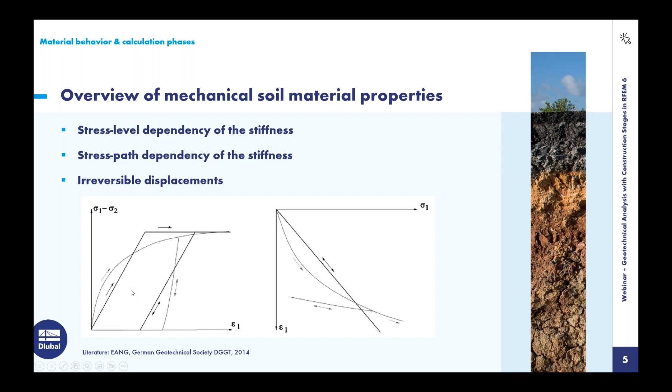Okay, so what follows from these properties is that we don't have explicitness for a stress state, strain state. For one stress state, there is no clear, no explicit strain state.

So this is what we do in the analysis. We calculate a first state of the soil, the initial state, where we only calculate the geostatic stress. Because as we can see, if we start here and consider this geostatic stress, we use the correct stiffness modulus. If we would start from zero and not consider the stress, we would use the wrong stiffness.

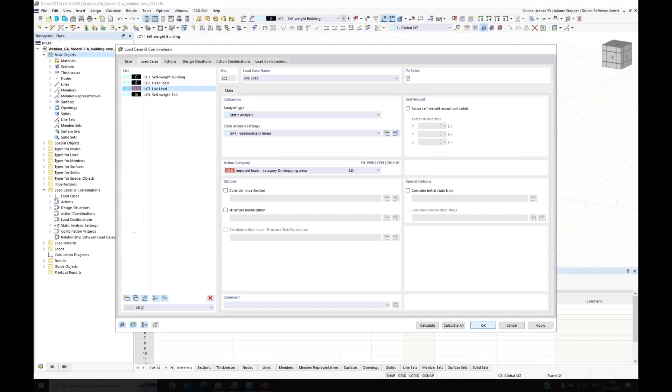Here we see the model we will work with. It is a prepared concrete structure, prepared because we want to focus on geotechnical analysis and construction stages analysis in this webinar. I used this in the previous webinar, but today we will use another material model and learn some details about it. We will use construction stages, so you can easily see differences in the modeling process for the same structure.

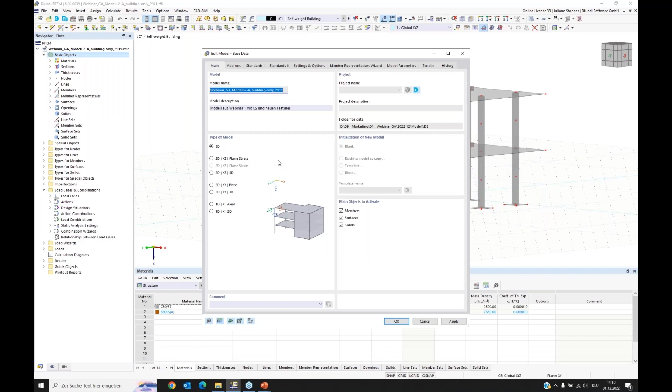Now we start. First, I will go to the base data and open the dialog. Here we have the register for add-ons, and we can find the geotechnical analysis in the special solutions add-ons list. It's activated, and I also need to activate the construction stages analysis in the analysis add-ons. I agree, and now our main program RFEM, the finite element program, has some more input options, calculations, and output options included for these add-ons.

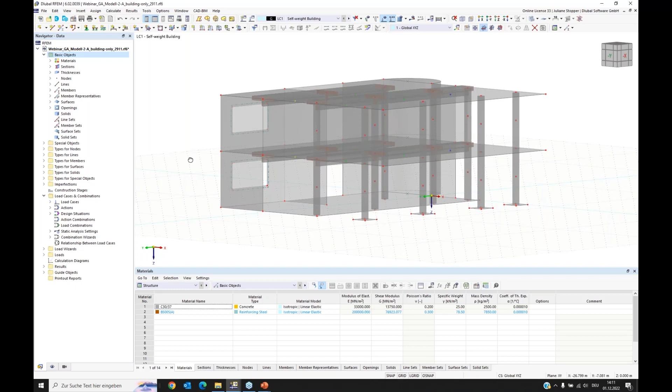Now we can start defining the data. First I will go to the materials, open the dialog, and here we can enter our soil materials. We already have the concrete and the reinforcement steel. I will now create a new material - it will be my first material, a fill layer which is sandy. This is the name of the material, and what we need to edit is the material type. Here we have soil provided, and we need to set the soil material type. Only if soil is selected are the specific soil material models provided.

As I said in the last webinar, I used the modified Cam clay model. Today we will use the nonlinear elastic model. On the right side we have the option to enter the basic material properties. I will start with the Poisson's ratio - I got these from my geotechnical report. The first layer was tested to have a drained specific weight of 17 and a saturated specific weight of 20 kilonewtons per cubic meter. So these are the basic properties.

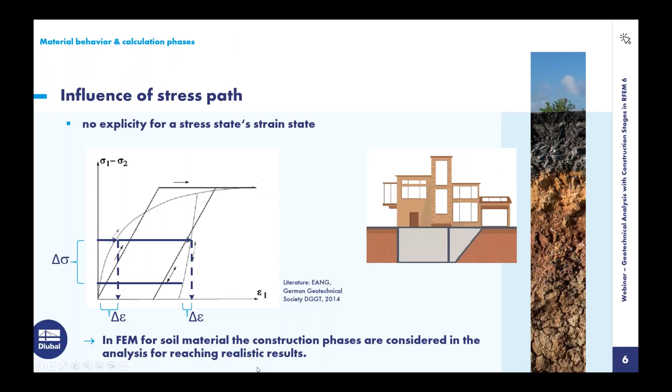We have here our stress. This is the variable value which the program calculates in the analysis and fills for every element, every situation specifically. We have the cohesion here, and we have the friction angle, which we know.

What we need to have also is a reference value of the stiffness. We need one value of the curve, which is given for one reference stress. We fill here the reference stress, and this is the reference value of the oedometric modulus, which is the value we also need to give. With these input parameters, we can calculate the oedometric modulus for each depth, for each stress condition.

And we also have this parameter. It's the power for the stress level dependency. This value generally moves in that range. It can reach between 0.5 and 1.0, 0.5 for sand and 1.0 for clay, somewhere in between.

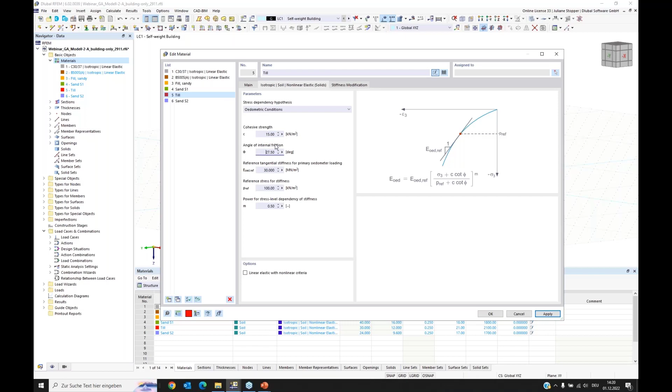So I have here 35 for the friction angle, and we have 58 for the stiffness. What I forgot is the cohesion - I didn't change it. In the till layer we have cohesion of 15 kilonewton per meter square. And this is it, these are my materials.

Now I can see they are defined in the model, and as the writing is in blue, it means these materials are not used yet in any objects. It will change later, it will be black like it's up there. I'm having a look at my basic objects, and I don't need another basic object.

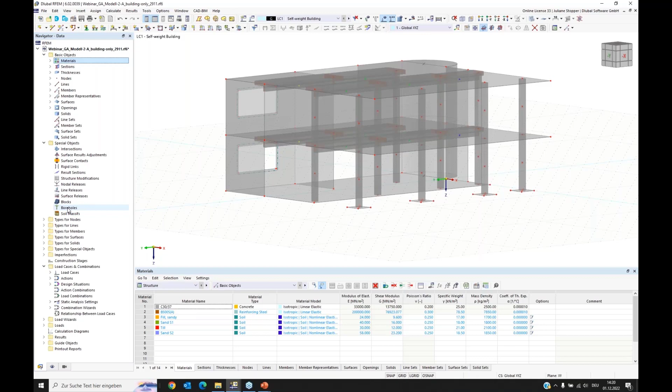We can go to the special objects, and here we find objects we can use for the Geotechnical Analysis add-on. We have here the boreholes, and I will create a new borehole. In this dialog, you can enter the boreholes that you received from your geotechnical report. There were tests done, and you have information about the boreholes that you can enter here.

I will now create one borehole. You can enter a name here - I will keep the default name. You have to enter the position, the top position - I will keep it at 0.

Then you can activate groundwater if you have one. For my situation, the groundwater was found to be at 3.9 meters depth. I agree to this, and then I can start to define the soil layers.

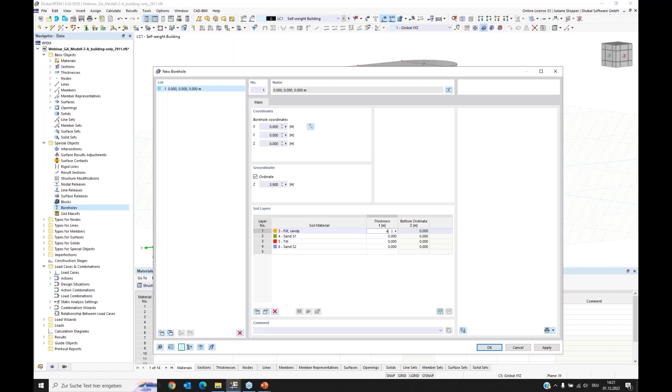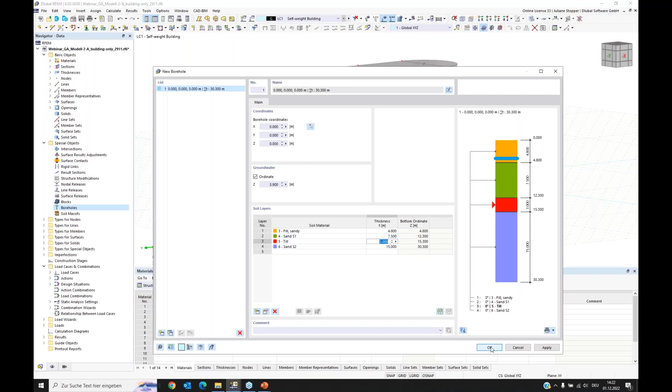In the upper layer I have the fill, then the sand follows, then I have my till and the second sand layer. These layers reach depths as follows: 4.8 meters for the first layer, 7.5 meters for the second layer, the till which is 3 meters thick, and 15 meters for the last layer. Now I defined all the information needed for my special object.

For my soil borehole, I can see it's shown here. I want to remove this grid - it can be found here, and I can set it to be not visible.

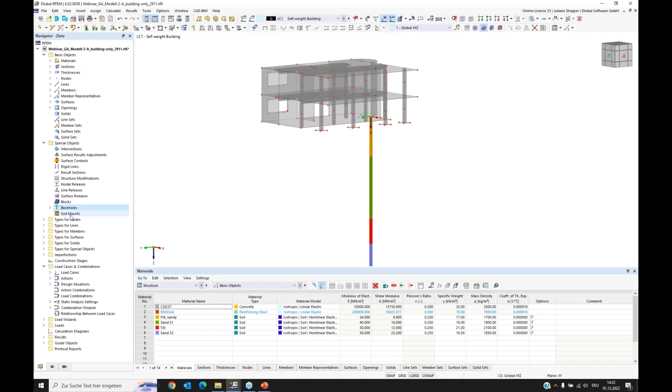Now I can create the soil structure. It can be found in soil massifs. I open it, and here we can generate the soil structure from boreholes. For this, we have to assign the boreholes - here we can write the number directly, or we can use the graphical selection.

We have to give the position of the massif. It's placed at 6 meters in X direction and 8 meters in Y direction, and it shall have dimensions of 48 meters in each direction.

And I have the option to activate the groundwater. We have groundwater and we want it to be considered, so I activate it. Now we gave all the information needed for generating the massif from the borehole, and with the generation of the massif, the groundwater surface will also be generated. I say okay, and here we can see our soil massif.

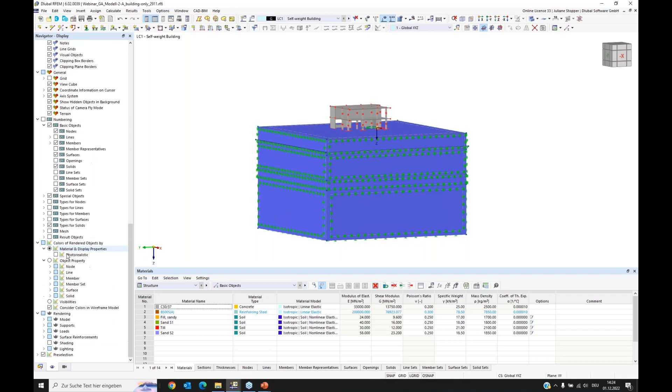We can see quite well the groundwater level surface. I will set the solid model, and go here to the navigator display where you can set display settings. I want my model to be displayed in colors dependent on the property, the material. Now I can see the soil layers quite well.

They were generated from the information that comes from the borehole. If we would have more boreholes, it would use spline functions and NURBS surfaces to generate the different layer surfaces between the different layers of the massif. I showed this in more detail in the last webinar. Today I only want to use one borehole.

Now we have the massif, and the massif generated soil solids. We have the soil solids - 4 solids, one for each layer - and as we saw, it generated the groundwater surface, and it also generated the surface supports.

The massif - we can see the surface supports and types for surfaces. Here we have surface supports. The blue ones I don't need, and I will remove them.

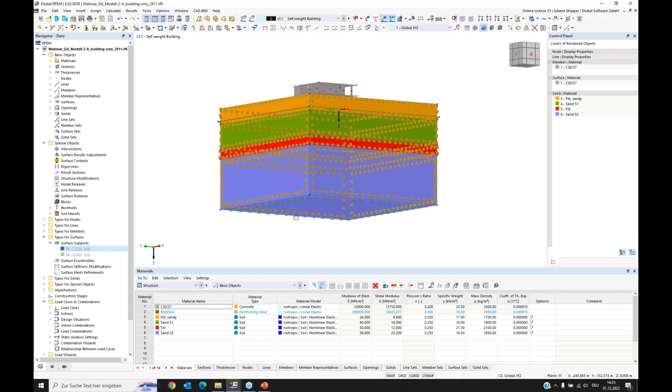We have surface supports for the vertical surrounding surfaces that are sliding supports, and the bottom surface has fixed surface support conditions. As we are here, I want to use these supports.

I want to create an object selection. For this I select the surface supports and go to Edit, and here we have Select, and here we can see related objects. Now I can see that all the surfaces related with these surface supports are selected. I do a right click and say Create Object Selection, and I will give it a name - it's the boundary surfaces.

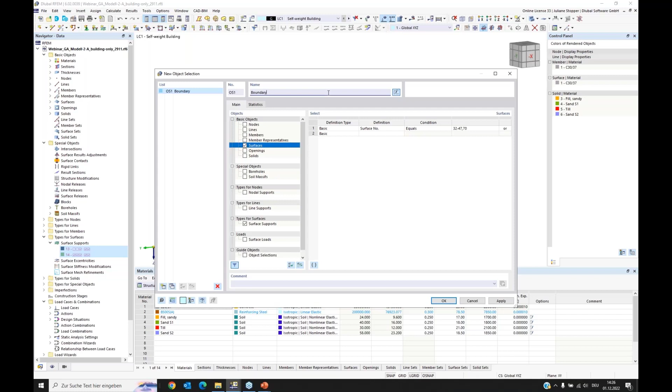This selection I can use later, and I can see them here in the guide objects. I have my object selections, and whenever I want to use the boundary surfaces, I can go here and I have them.

Now I want to go on. We defined the structure of the soil. We have our building, we have the geometrical boundary conditions. Now we need the load conditions.

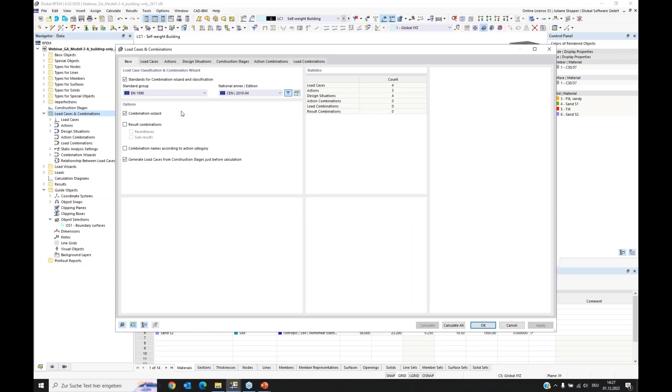For this, we go to the dialog for load cases and combinations. I just shortly want to show you the loads which I prepared. We have here, I want to start with the last load case of the list.

If we activate the add-on Geotechnical Analysis, we have a special action category called permanent soil. If we activate this action category, the self-weight that is activated uses only soil solids for the self-weight calculation of this load case. So this is the load case that calculates the self-weight of the soil, which we need for the geostatic stress calculation for the initial state.

Okay, and then we have in load case 1 the self-weight of the building. Here we can see that the self-weight is activated except for soil solids self-weight. And then we have dead load and live load, which are prepared in that model.

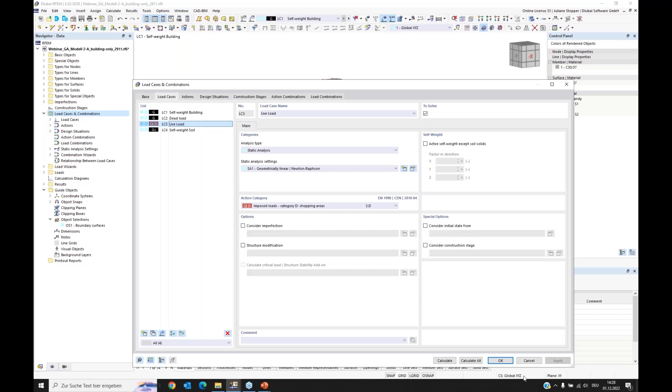I can have a look at them. We have here the live load, here the dead load, and I can deactivate the loads with this button.

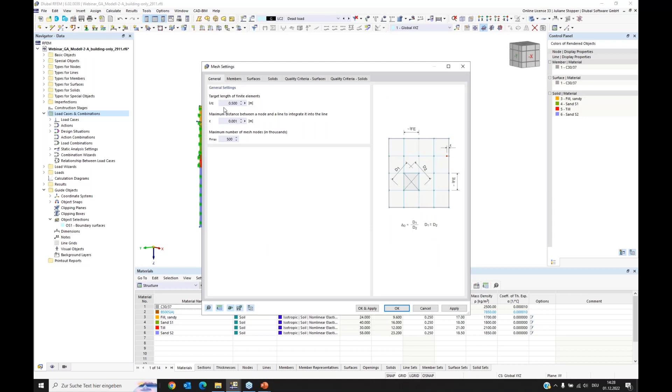What we also have are some special mesh settings, which we can find in Calculate. Here the mesh settings are placed, and we have the general settings that contain the target length of the finite elements for the structure. We also have the option in solids to activate a special target length for finite elements of the soil solid, as it is much bigger and needs larger elements.

So this I wanted to show you. We keep the default settings. Now our structure is prepared and we could do the finite element analysis, but we want to use construction stages, and these need to be defined now.

As we can see here, we have this point in the navigator, which came from activating construction stages analysis, and I click on New Construction Stage to come to the dialog. In this dialog, I have to define which objects shall belong to a construction stage or shall be considered in the calculation. This is my first construction stage, so it will be the stage where only the soil solids' self-weight is calculated.

For this, I need to make a change in the solids, and I need to make a change in the surfaces. I have to consider the boundary surfaces. By activating them, the special registers were opened, and I can add or deactivate solids here, and I want to consider all solids in this construction stage.

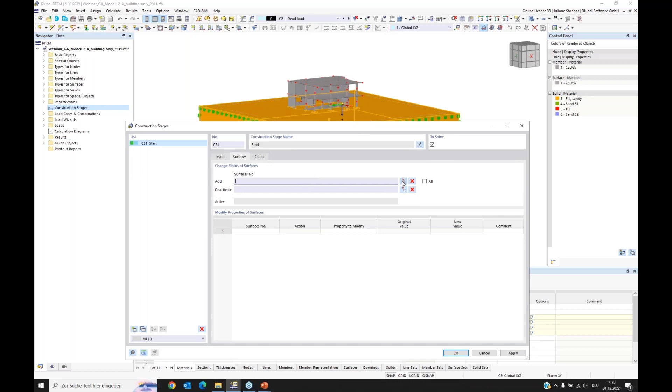Now they are selected. And here I want to add the boundary surfaces, and for this I can now use my object selection. I have prepared it, and I can click here and it is added. So now my surfaces for the surface supports are added.

I also add my surface for the groundwater level, which is surface number 27. Okay, I apply this and I have my first stage defined.

Then I define a second stage. This will be a stage where I will change something in the static analysis settings, which I'll show later. In this stage, I don't want to change anything in the structure. I still only want to have soil here, so I don't need to change anything. I can deactivate these fields.

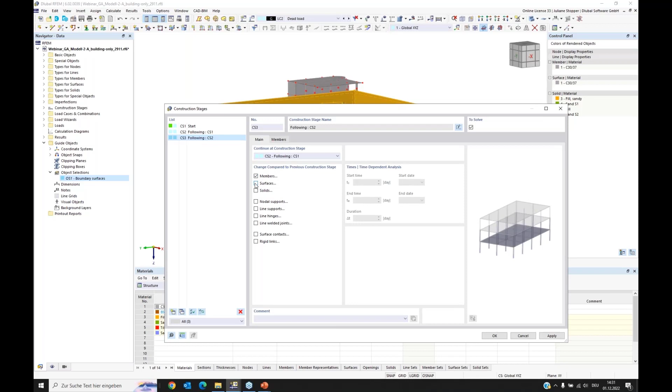Now I can create a third construction stage, and here I want to add my building. So what is contained in my building needs a change in the members and in the surfaces. In the dialog for members, I can say I want all members to be considered, and I want all surfaces to be considered. Now it is okay. I have created 3 construction stages and I can see them here.

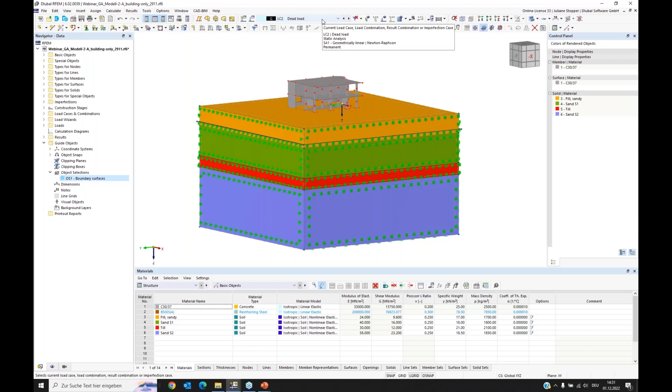The program reacts more slowly due to the use of GoToWebinar. Okay, I have something activated—show hidden objects and background.

I don't want this, so now this is what we have. We can see what we have in construction stage 1: the soil as I wanted it and the groundwater level surface. In stage 2, I wanted to have it like this as well. And in stage 3, my building will be activated.

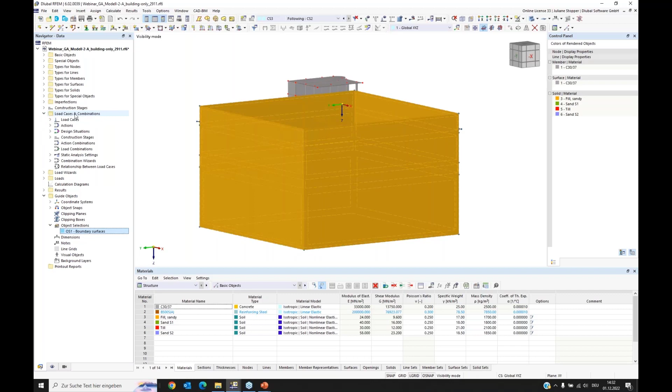This is the topology part of the construction stages. Now I also have to set the loads, which loads shall be active in which stage. I have to give this information. For this, we have the construction stages input placed.

I go to the dialog and can see the stages listed here, and I can do load settings for them. So we are now in the first stage, and we have the register load cases. Here I can say that I want the self-weight for soil to be considered. In the second stage, I also want only the self-weight for soil to be considered.

And as it is a permanent load, it is already there—it comes from stage 1. In stage 3, my building is placed, and I want the self-weight of my building to be considered.

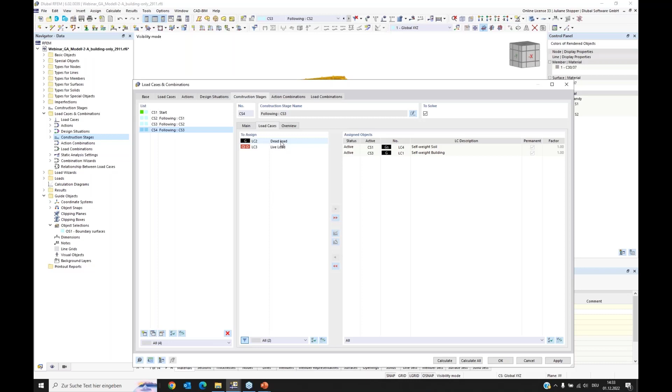Then I create a next stage. In this stage, I want the dead load to be placed. Then I activate or create another stage. In this stage, I want the live load to be used.

Okay, so I have 5 construction stages in my model. What I need to do now is set my second stage. In this stage, I want to reset the displacements.

If we think about the first stage, in that stage we calculate the geostatic stress in the soil solid, and we also receive from this geostatic stress displacements in the soil solid. But I don't want to see these displacements in my results. I want that when my construction of the building starts, this is my zero point for the displacements.

Therefore, I reset the displacements of the geostatic stress state, and I will do this in the second stage. We have the special feature for resetting the displacement in the static analysis settings, that's why I open them here. Our SA1 is the static analysis settings we use.

I also change the load increments as we use the non-linear material model. I want the load to be put in increments, and as I entered 4 here, I now have the option to save results of all load increments. I want this to be done. Okay, this is my basic setting.

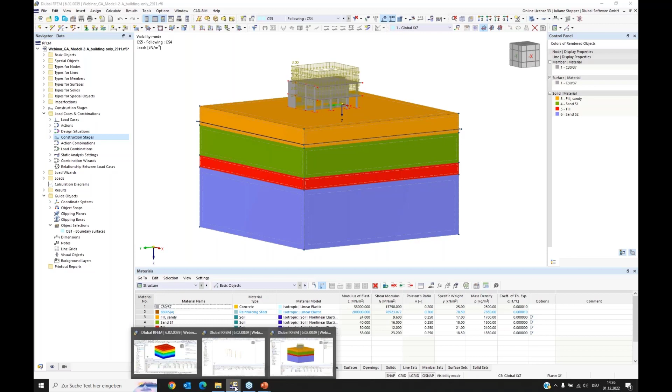I won't do this now. In order to save time, I prepared a model which is finished and calculated, and we will have a look at it with that model. I get it to here. It's a bit slow.

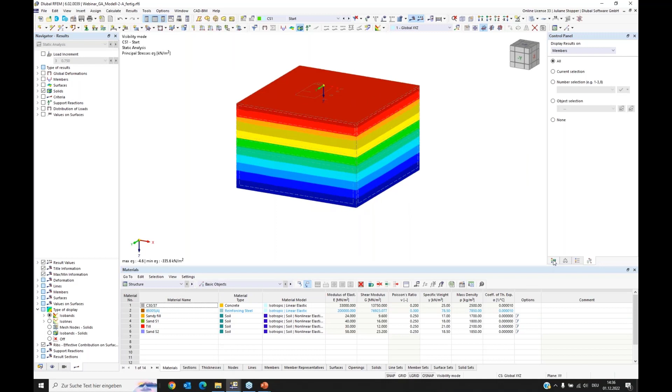Okay, so here we see the equivalent model after it is solved. We can see now the first construction stage, and we can see the navigator results, and we have solid results. I will at first show the sigma z in z direction, and this is the stresses we receive only from self-weight of soil. This is my initial state, from that we start the construction.

As I said, these stresses cause, of course, global deformations—we can see them here. And I don't want these deformations to be displayed in my results for my structure. That's why I reset these displacements in my second stage.

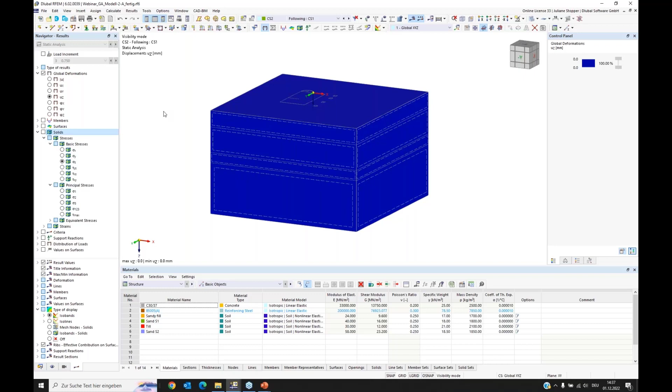Now we can switch to the second stage, and we can see that it worked quite well. We have no displacements now, no deformations in this soil solid. When we have a look at the stresses, we can see that we have the stresses. So I reached what I wanted: I have the stress considered, but the displacements are reset. Okay, now the building can be put on the soil.

And I can see my global deformations only caused from the building. Okay, this is as a short overview.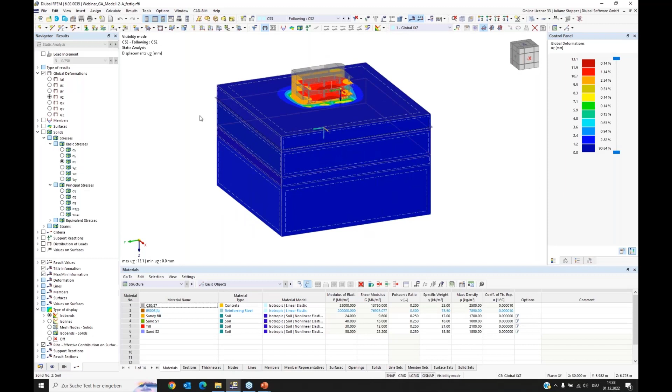Now I want to show some more stress results. This is my stress in Z direction, after the construction is built and the self-weight of the construction is considered. I have also my dead load assigned, and we can have a look at the load. And in this stage, stage 5, my last stage, I have also the live load assigned.

And this is my total stress at the bottom of the solid. If we compare the stress received at the bottom surface with the stress from the initial state, we can see that the stress changed only by about 1%. So the distance of my building to the bottom surface, for example, is far enough.

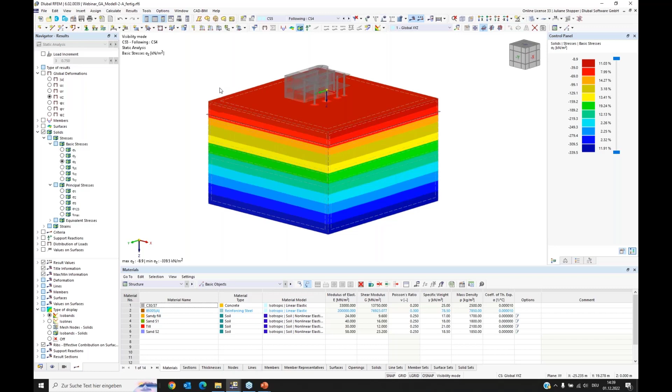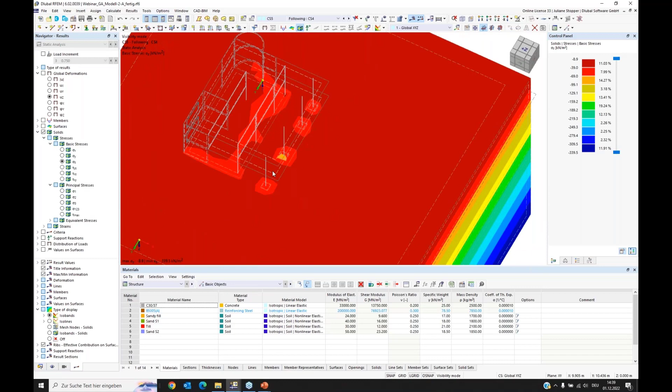What is also of interest for us is the contact stresses. Therefore, I will go to the wireframe model view to show this perspective. And as we can see, the result is not easy to analyze, as the high stress values of the solid are considered.

Therefore, we have the option to get differential results only for stresses of the building, because now we know that in our whole structure the result of the stresses of the soil self-weight is considered. If we check the differential result, only the result of the building, we can see the contact stresses.

From the structure, therefore I prepared load cases. This needs to be done for load combinations I prepared. I will only shortly open this dialog.

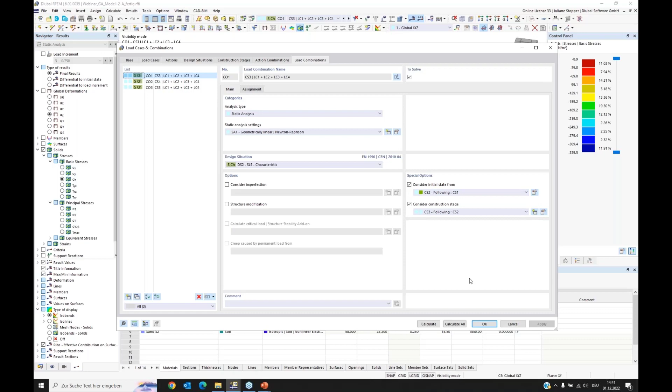There you can follow the definition of the load combinations more in detail. In this load combination, construction stage 3 is considered, and its initial state is construction stage 2. And now I can check the differential result, which is the result between this load combination and its initial state, which was the load case or stage that considers only the soil self-weight. So now in here we only have the self-weight of the superstructure and its effect on the soil.

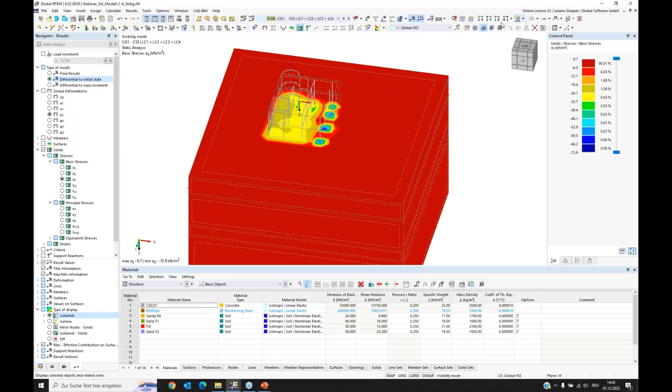I will have a click here and again here. Yeah, and now it's more easy to check the contact stresses below my building.

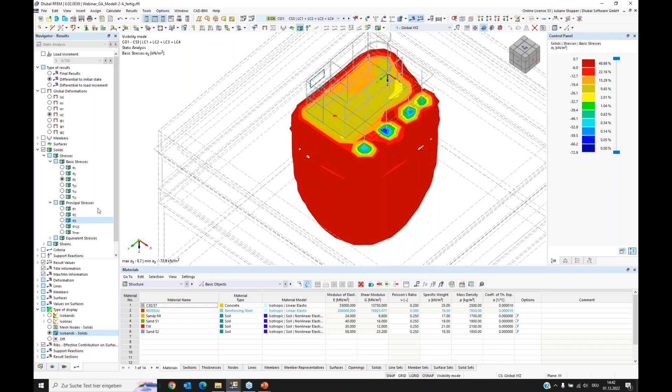I also want to show another display type. You also can use isobands for solids. And I can have a look, for example, at principal stresses sigma 3. And now I can see how this building self-weight affects the soil solid.

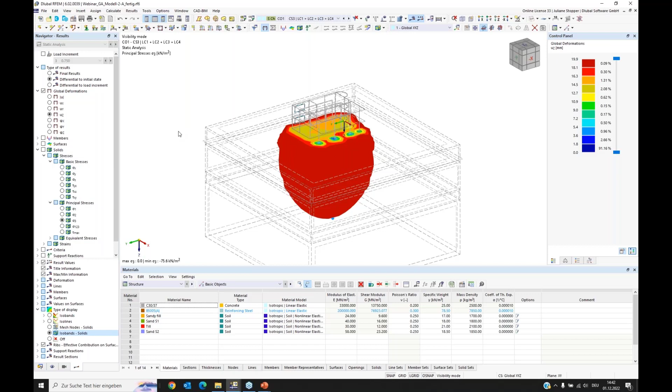This I wanted to show you. Now shortly also I want to go back to the displacements or deformations. We can go here and have the isobands display type. And now I want final results.

And I can go back to construction stage 5, which is the sum of all the building, of the dead load, of the live load.

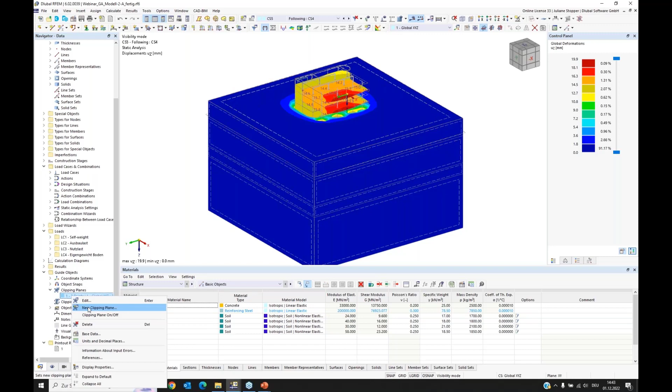And we have a tool which is quite helpful for the analysis of the results. We have here in the guide objects the option to define clipping planes. I prepared one and I will switch it on. And I have a cut through my solid. I can define the plane in the position I want, in the slope I want, and I can have a look into the inside of the solid.

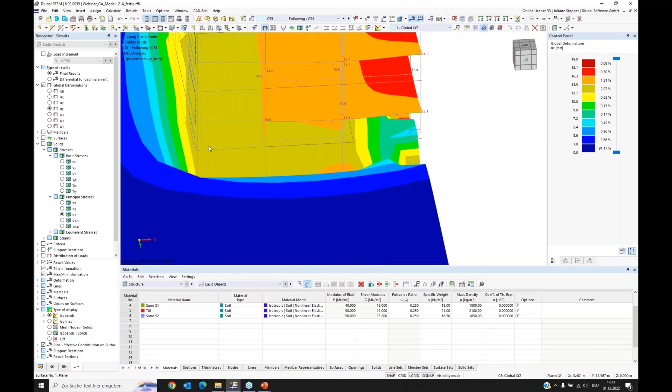What we can see in this graphic is that by considering the soil solid, the soil structure interaction can be analyzed quite well. We can see effects like, for example, the surface here, the foundation slab and its settlements. It has an effect on these foundations of the columns, and even these foundations have an interaction with each other.

And if you want to change something in your building, or you need to change some cross sections or some stiffness somewhere, directly the effect is considered in your analysis and in the soil structure interaction. This is the benefit of modeling it like this.

Okay, what I want to show you also is we have saved the load increments. So I can also have a look at the load increment results. I can activate it here, and then I can go from, for example, 25% of the load up to 1.

And I can have a right click in here and start an animation, and I can see how the building is settling. This sometimes can be helpful in understanding the behavior. Okay, and having a click somewhere here ends this animation.

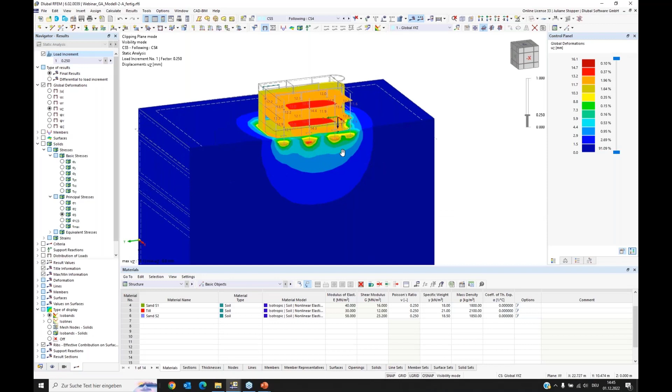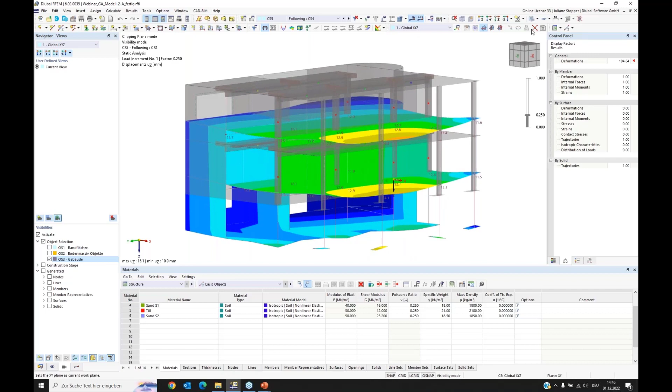Okay, I have another object selection prepared, which I can activate in the visibilities. I deactivate the construction stage visibilities and activate my object selections. I have one prepared which only contains the soil solid, and another which only contains the building. This can be helpful after you checked the soil results and did your documentation - if you want to look at your building, you don't need the whole solid displayed. You can just use this selection and look at your building in detail, at the columns, surfaces, beams and so on.

Yes, and for analyzing these results, you can use all the tools we have, like doing result sections and so on.

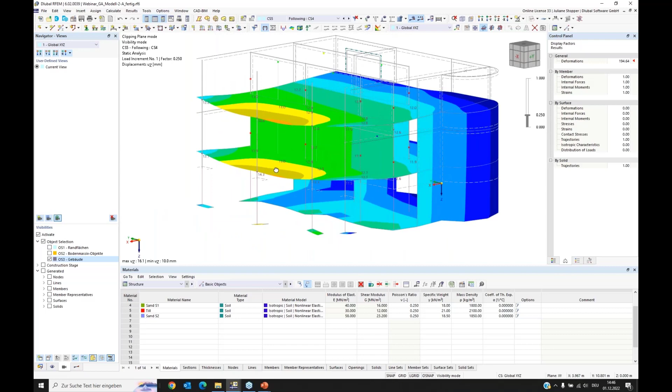This shall be it for this model. I want to finish the model now and go to the short example for showing some modeling techniques which you have for defining uneven terrain. As I said, in this time of this webinar, I only could give a short introduction into the construction stages add-on.

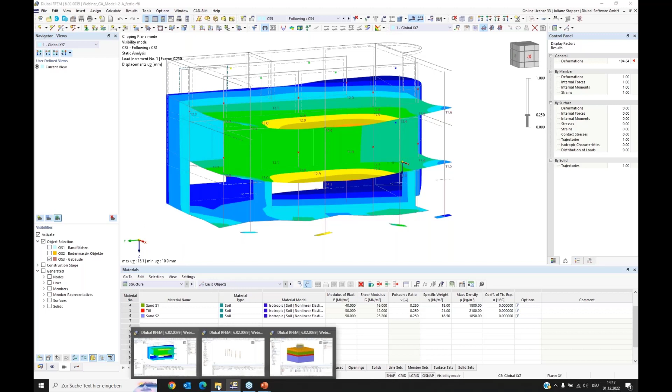We have the special webinar for it, which you can have a look at. In my last webinar, I had more time for the results. You also can have a look at the last webinar for seeing some more result analysis ways. Okay, now I close this model and we switch to the simple model for showing some modeling things.

I have here more boreholes. As we know, they are in the special objects. And here I have my boreholes, which came from my geotechnical report. And my soil layers, they are different in the boreholes.

Now I define my soil massif. I select my boreholes - I want to use those. I select them and give the position. It's placed at 20 and shall be 80 meters in this direction and only 5 meters in this. I model it a bit like a stripe because it's easier to see the effects I want to show.

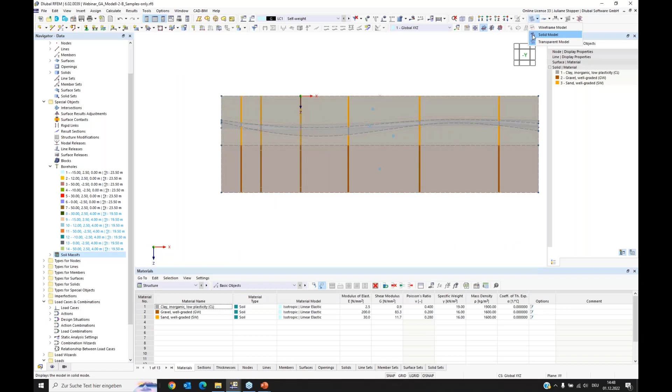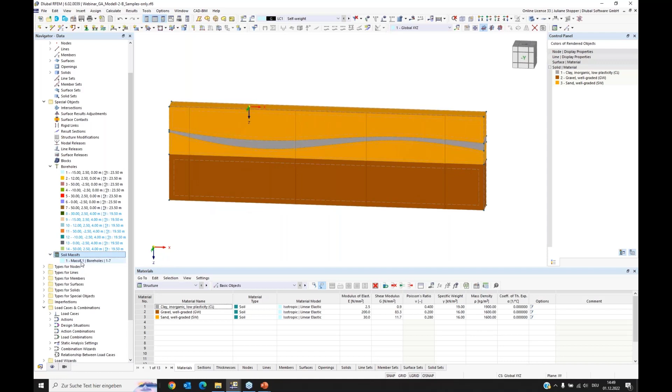As you can see, now the massif was generated and the soil layer surfaces were generated quite well from the boreholes. This is one option to model it. But if I want to model uneven terrain, it can make sense to not only use one massif, so I delete it. You can also divide it into separate massifs.

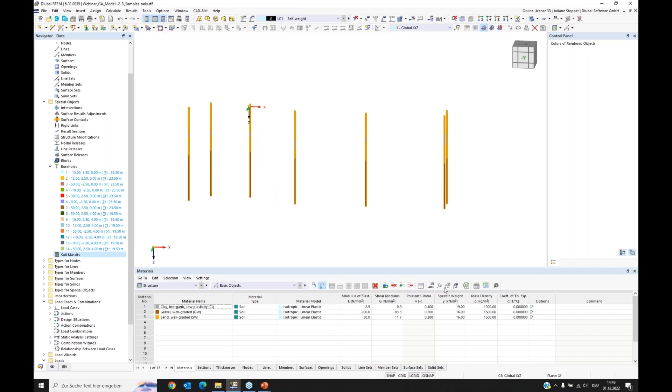Therefore I again go to the dialog and now I create a smaller massif, which is placed at -7 and is only 20 meters in A direction and again 5 in B direction, and I use the same boreholes. And I can activate this. Now I see I have one massif here, and I can copy this and create a second one next to the first.

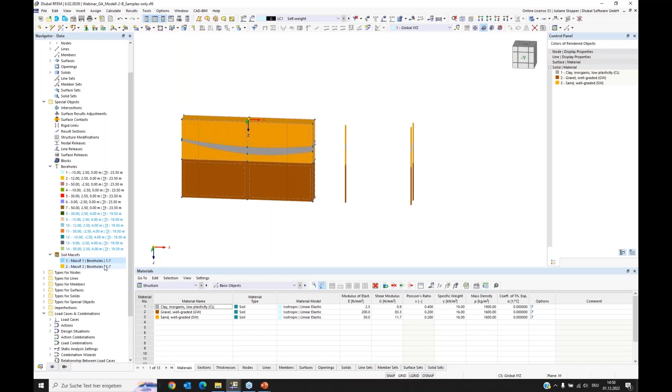And for these small massifs, I always use all boreholes, and this causes that the soil layer surfaces still fit as well as if I would model it as one massif. Okay, what I need to show is...

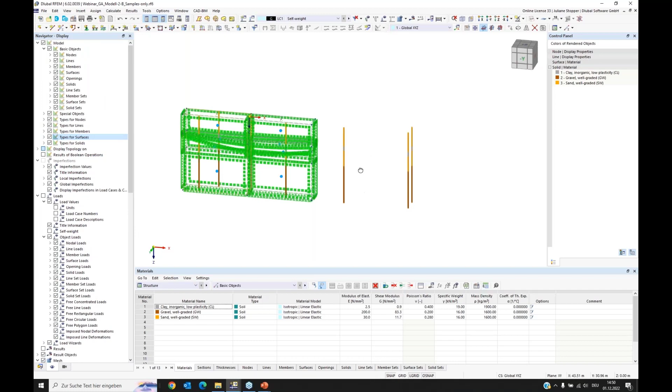If we generate the massifs, of course the surface supports are generated as well. I have deactivated the view - I will activate it. They can be found here. And I see that in the contact surface I have the surface supports.

These I need to remove manually up to now. We are working on that - it will be automatic if there are neighbored massifs.

Okay, now we can go to surface supports and say edit assignment. And here we can select that there shall be no surface support at these surfaces. And now it is fine. I go back to the solid view and again deactivate the display of the surface supports.

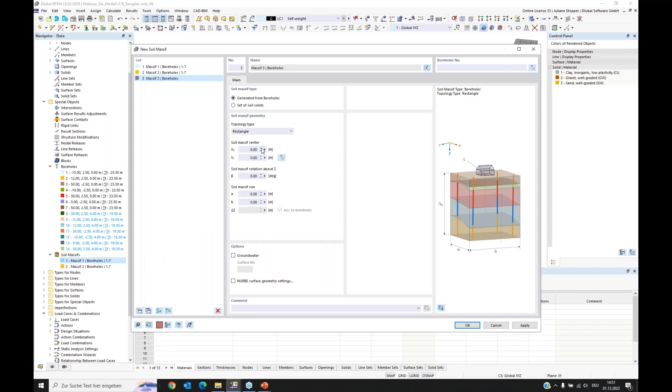Okay, what I can do else is I can define a new massif, and I want it to be placed in a deeper depth - I mean, I want the surface to be in a deeper depth. So I will do it like this: I will use a copy. I copy this massif, and it will be placed at 30 next to the previous one, and I will use other boreholes. For this case, I prepared a copy of these boreholes, and in that copy I set another Z value, and the height is different. So you will see the effect soon.

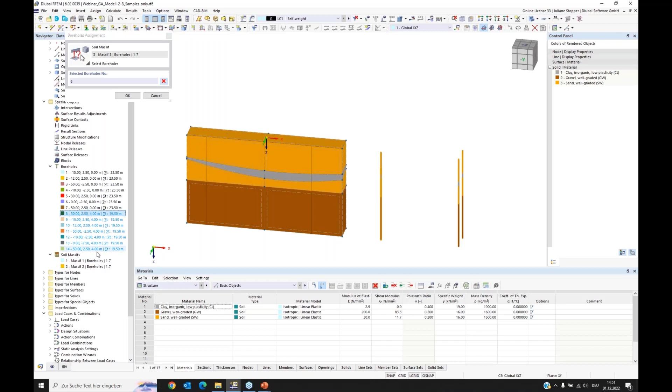What happens now is that this massif starts at the Z value of these boreholes, and now I have a different top surface level. This is possible to do. I did that, I don't need a new one, I want a copy.

I will put another massif next to it, and I will again use these, and the X position shall be 50.

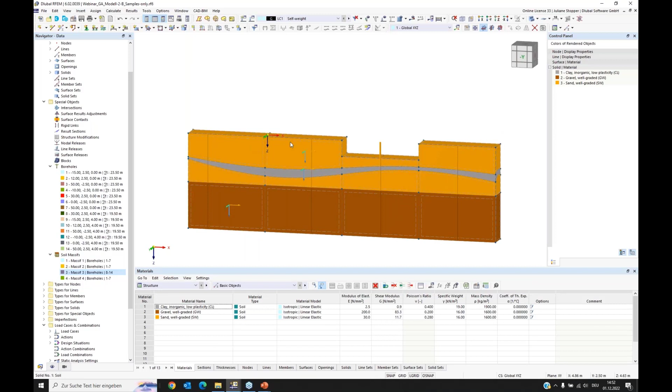Now we have different massifs, and what we can do is use this technique if we want different mesh settings. For example, if our building will be placed here, maybe I want a finer mesh in here, but I don't need a fine mesh here. So dividing it into different massifs can help make the mesh creation more flexible.

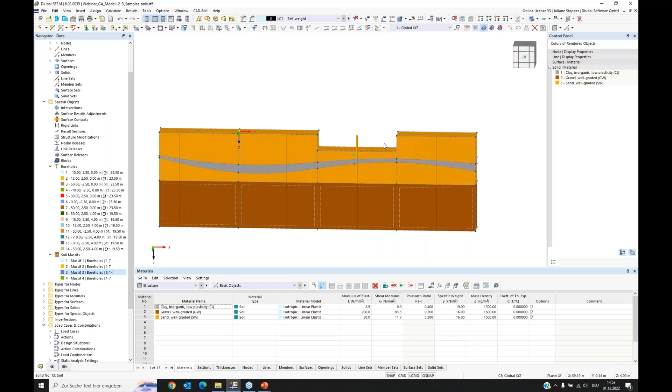I also want to edit the geometry manually, so it's helpful to separate it like this. Now we go to the massif dialog. As I said, these massifs were generated from boreholes, and the solids produced by them have a generated status, meaning they are connected with the massif and with the boreholes. So if something in the boreholes changes, like the material or coordinates, the massif changes automatically. This is the generated state.

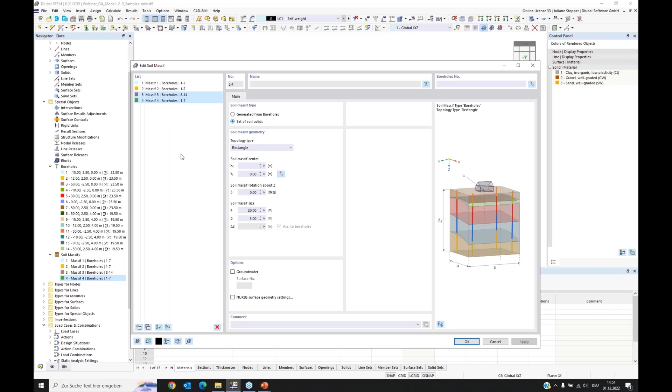I can deactivate the state, because in the generated state I cannot edit the geometry of the massif. If I've reached a modeling phase where I want to change the geometry, I can change the soil massif type, and I want to do it for massif 3 and 4. I select both, and I set the soil massif type to set of solids. Then the connection of the solids to the massif, and especially to the boreholes, is deactivated. So if I change something in the boreholes, these two massifs won't be changed, but it enables us to change the geometry.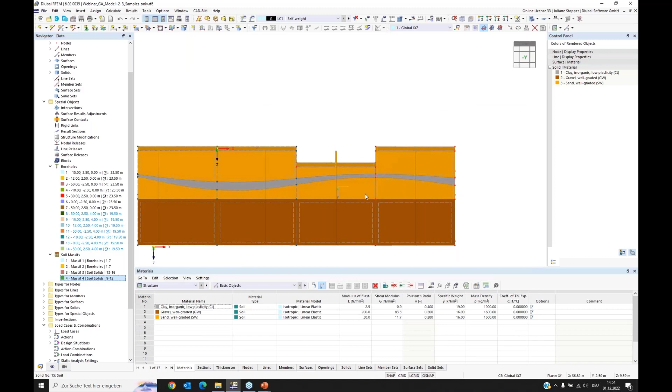So I want to do this now. I want to have a slope in the ground surface. Therefore I need to put these nodes into the line. I want my line divided into parts at that node, and I can use this button for that. I select it, and now my line is divided.

Now I can select this line and the two nodes and say please move them in X direction by 6 meters. I say OK, now it's moved. It happened that a surface was disturbed - I can show, here it's red, it's invalid. I go to edit to repair it, and I will remove these lines as the surface cannot go around the corner like this.

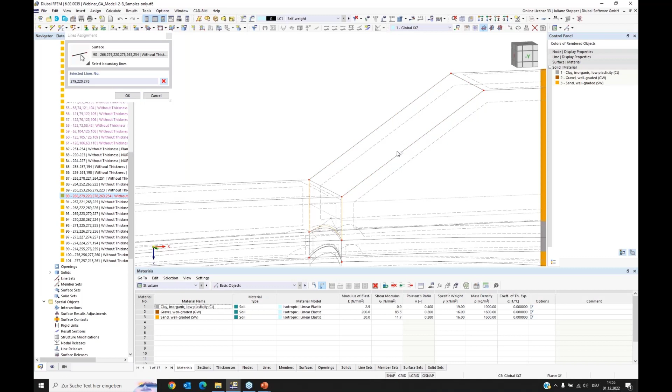For removing it, I can press Shift - you see the minus, then it's removed from the list. If I don't press a button, a line is added. I can say OK, and now I have fixed my surface, and I can create a new surface for this area.

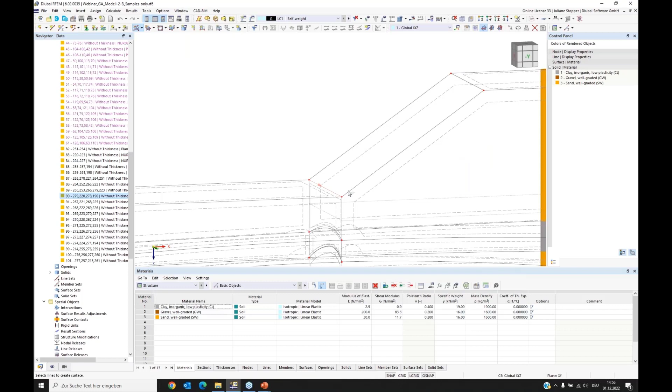We need the surfaces for defining the shape of the solid. So I need to select boundaries, and I changed the stiffness type to without thickness - I don't need a thickness in this surface, it only shall define the geometry for the solid. Now I have a surface here.

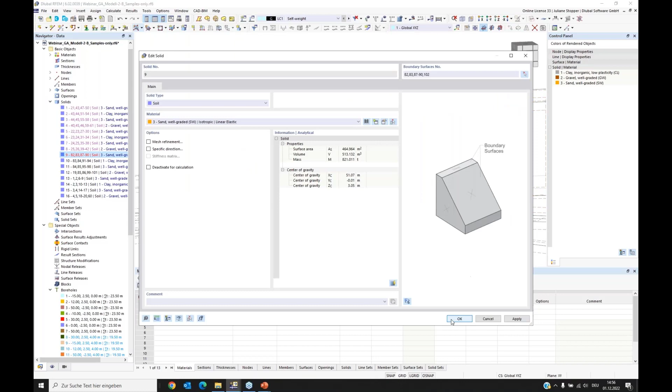And I also have to change the solid. As I can see, it's also red because the surfaces were changed, and I have to add the new surface I defined. Now my solid will be fine as well.

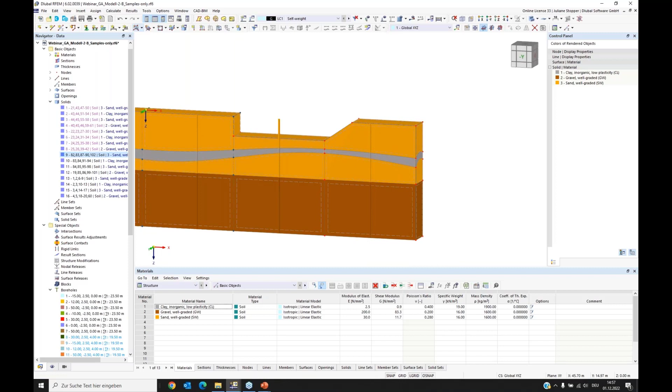I'm deactivating this massive shape. Now we can see, if we look at the solid model, that we also have the slope, and you can do everything - add surfaces that you want, add nodes, and edit with all the tools we have for modeling. You can edit your soil solid shape.

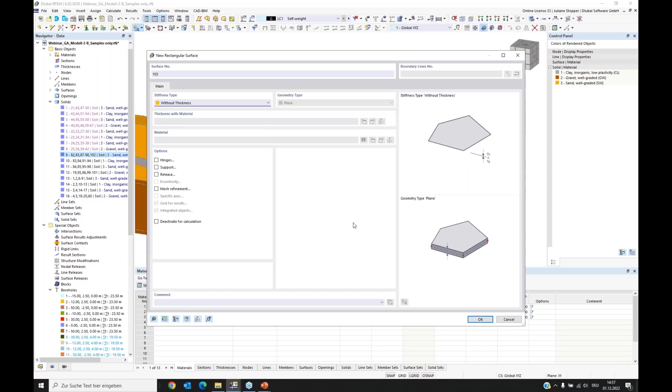I want to show you another helpful tool we have for modeling with solids. We have the option to define intersections. I will create another surface without thickness, which I want to place here, and I move this node, this line, and this node in X direction, maybe like this.

Okay, now I have here a new surface and I want to extrude it into a solid. If I right click on it, I have the option to extrude and create a solid directly from that surface by extrusion.

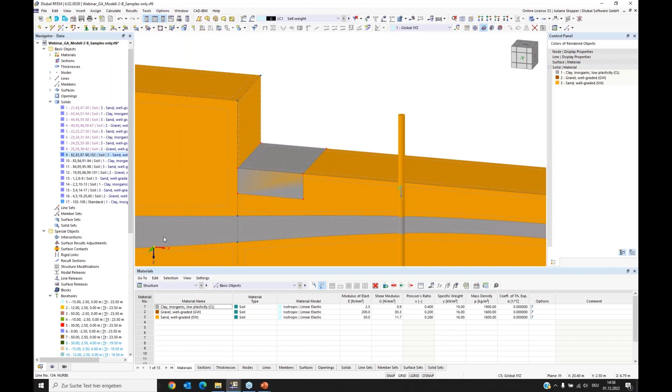Here I have to enter the height of the extrusion, and I say apply. Then I can see that a new solid is placed here, and the solid is in my list, the last solid. I can open this solid and see that my solid type is standard.

I don't want a standard type solid. I want an intersection solid type. This solid shall give the shape of the intersection, and I say okay.

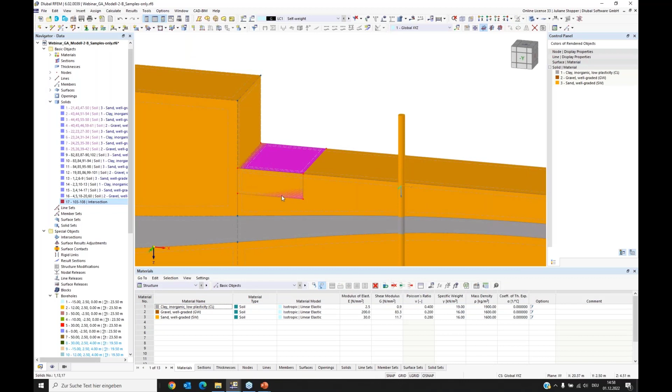Now I have my intersection here, and since I have a solid intersection in my solid, I can cut them. So I select this layer, right click, go to solids, and here I have the option to choose cut by solid intersections. I get a warning and I say okay, I agree, and now it's cut.

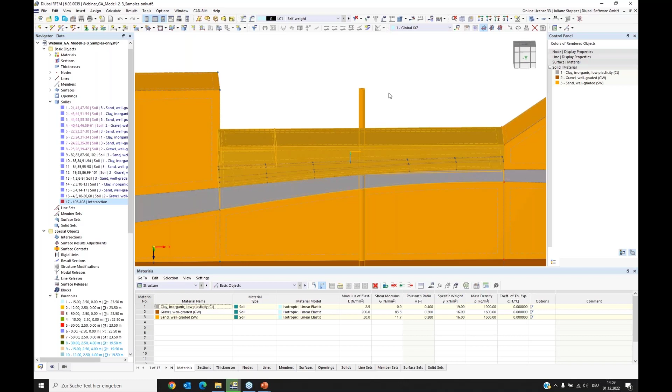It's really slow because of GoToWebinar, it wouldn't normally be that slow. Okay, now my solid is cut. I have divided this layer into this solid and this solid. Now I want to delete this to show you that it worked.

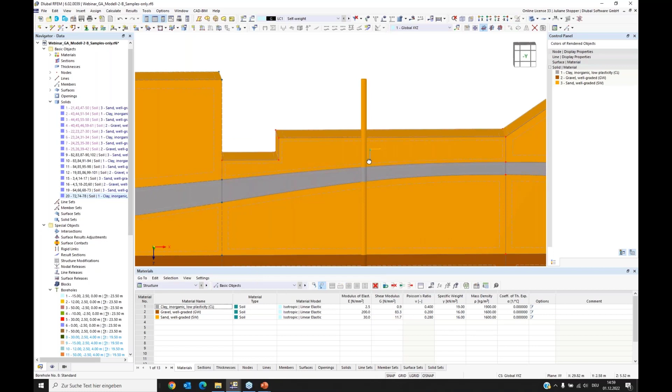I used this solid intersection in order to cut a shape that was defined by the intersection shape into my solid. Okay, this was it.

These were the short modeling techniques I wanted to show. In my work in customer support, I received questions on this topic several times, so that's why I showed this small model.

Okay, this was it from my side today for this webinar regarding geotechnical analysis and construction stages.

I want to also give a very short outlook. We are currently working on finishing the hardening soil model so we can provide it to customers for the analysis. We also work on pile foundations, this is one topic we are working on. And then we also work on topics related to the mesh definition in order to improve it.